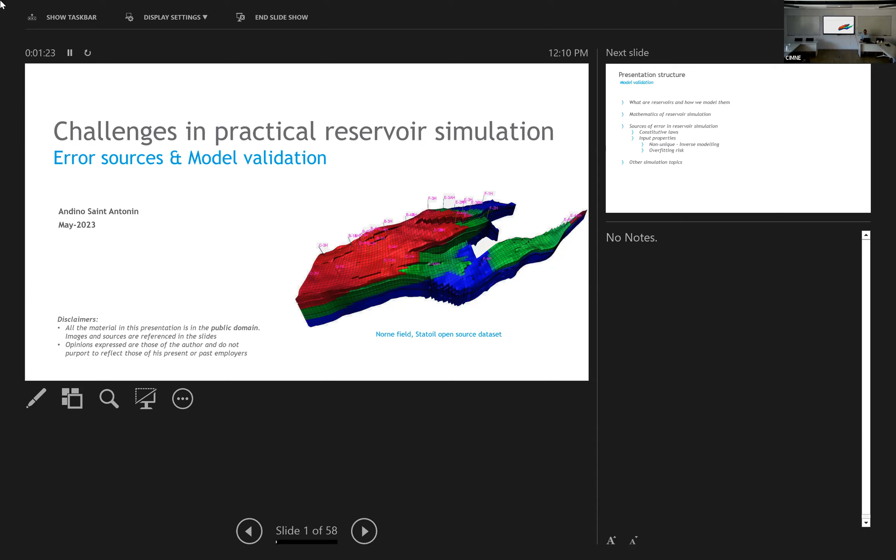Very quickly, a presentation structure. I'm going to introduce reservoirs, the physical processes we model, and how we model them. I'll go a bit into the math used to model reservoirs, then into the big topic, which is the sources of error. I'll also cover constitutive laws, and something specific to the oil industry: we're not very confident about the properties of the domains we're modeling, so we do a lot of inverse modeling. Then I'll mention a couple more simulation topics that might be of interest.

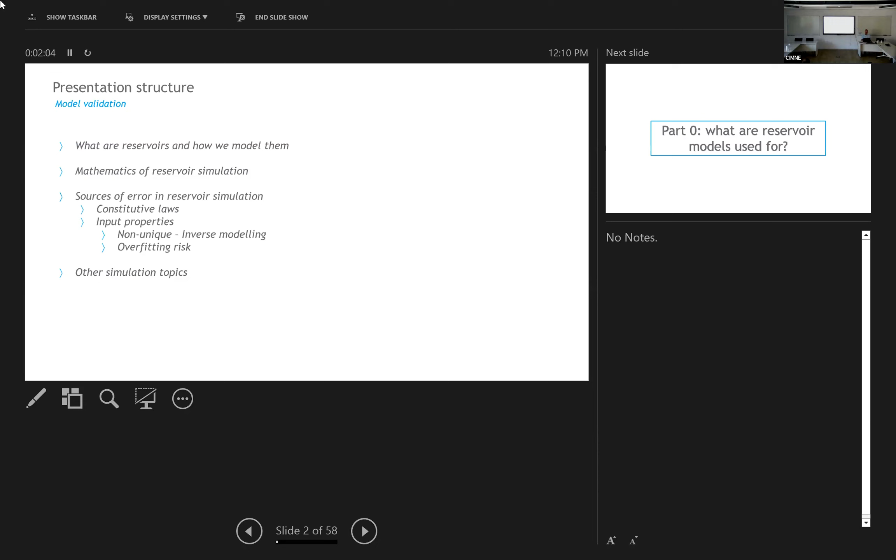So first, what is a reservoir? A reservoir is a porous rock that bears oil or gas, and oil or gas have less density than water. If you drill a well downward, you will always find water. All rocks are always porous and always water bearing; after 5 or 6 meters, wherever the water table is, you will find water. Water is much denser than any hydrocarbon. So whenever hydrocarbons are generated in the mother rock at high temperatures and pressures, they float up through this porous medium.

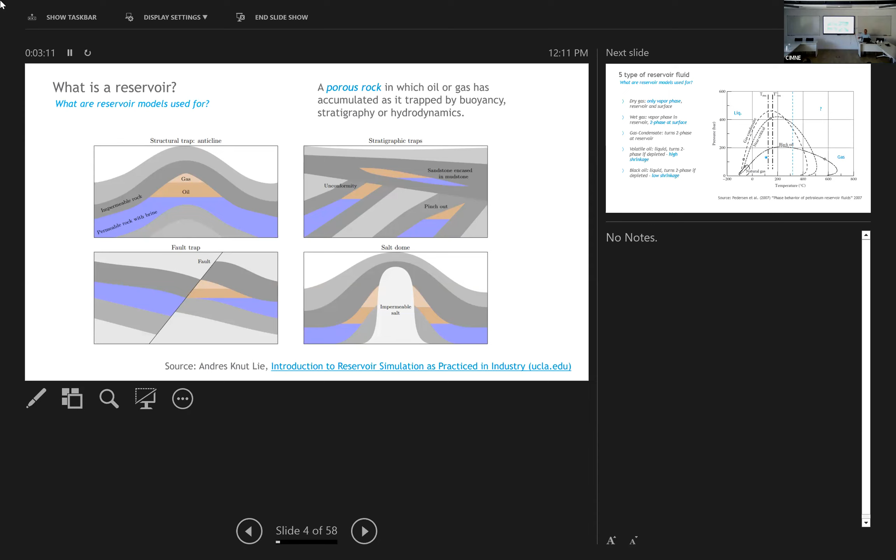Occasionally, a very small percentage of these hydrocarbons migrating up through geological time get trapped by some seal rock. There are variations, but it's normally a structural anticline or a fault that generates a seal where it normally shouldn't be, or a salt diapir that deforms and causes a structural trap.

There are 5 types of fluids. You might be familiar with gas and oil, but there's actually a lot in between. What we call gas is actually dry gas, which is basically only a vapor phase, both in the reservoir and at surface conditions. However, all the other gases, such as wet gas and gas condensate, turn two-phase.

Gas condensate has what's called retrograde behavior: you depressurize the reservoir and liquid drops out of it. It's strange, rather counterintuitive. Then you have classical black oil, defined by low shrinkage, so as you lower the pressure some gas comes out but not too much. High shrinkage oils, or high volatile oils, shrink by a lot when depleted.

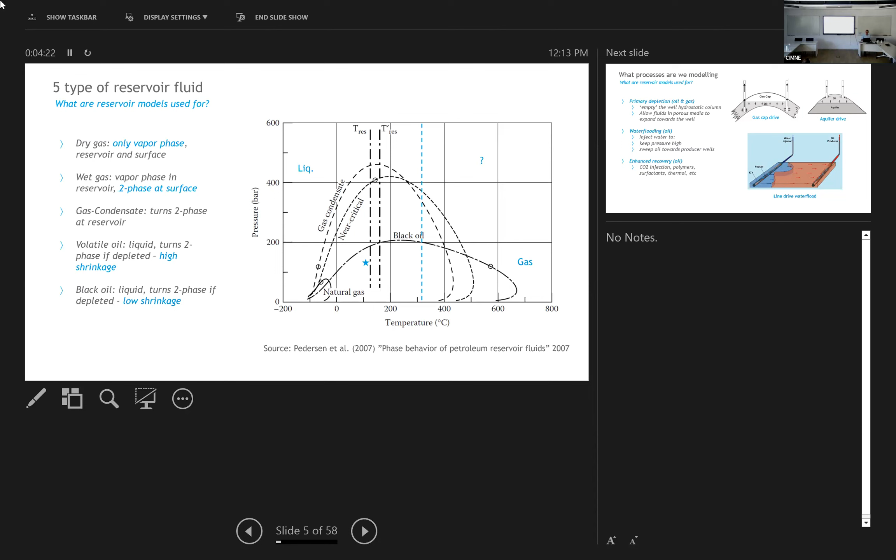So grosso modo, these are the fluids that we have. So what kind of processes do we model?

There are essentially three basic processes, three categories of basic processes, and there's a family within each one. The first one we call primary depletion.

The idea here is you drill a well to reach your reservoir. When you're drilling a well, this is a very important concept: at all times, the well must be dead. You cannot let fluids from the formation into the well, because that causes a blowout, and these are newsworthy events. So when you drill a well, you have this mud weight, this mud column, that's basically keeping the pressure inside the well higher than any layer cake formation that you're touching.

Once you lower your casing, you cement your well, you perforate exactly only what you want to allow to produce. You can remove the hydrostatic column from the well using pumps or other methods - that's a whole topic. You lower the pressure on this well, which behaves like a pressure sink, and your fluids, which are at high pressure, start moving towards your wellbore. If that's all you do in the reservoir, that's called depletion.

You might get some help. Normally the single phase expansion of oil will only recover about 3% of the volume, depending on conditions. But you might get lucky and have a gas cap on top, and the gas cap behaves like a gas - if you lower the pressure to half, the volume will expand by 2x. So if you drill your wells in the low portions, the gas cap might give you extra energy, and your pressure doesn't get lost so much.

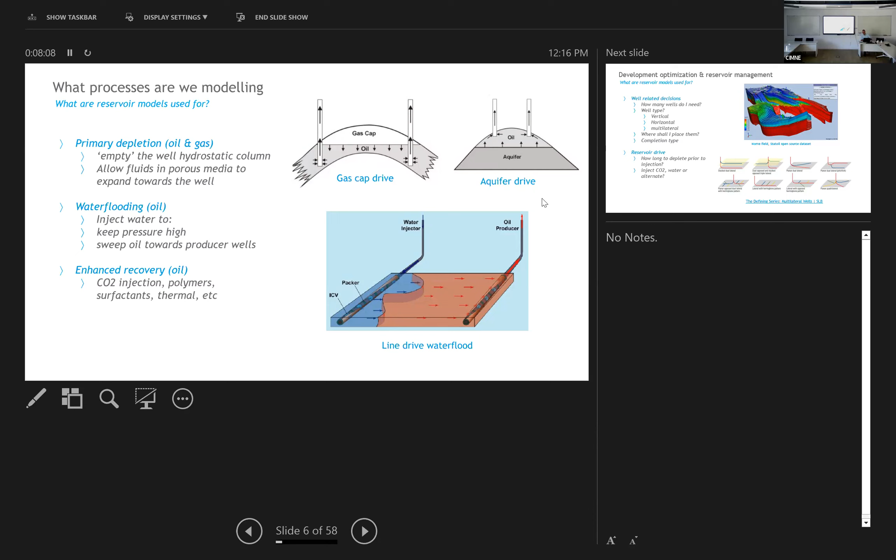So what do we use these models for? There are so many uses. The first one, which is my specialization, is development optimization. You have this oil field that has been discovered - perhaps 3 exploration wells, 10 appraisal wells - and you have to make a business development decision. How many wells are we going to put in this field? Will they be vertical, horizontal, multilaterals? Where should I place them? Shall I target a specific formation? Shall I stay away from the aquifer because I expect it will be strong, or stay away from the top because I expect the gas cap to develop? For all these questions, simulation models are the perfect tool.

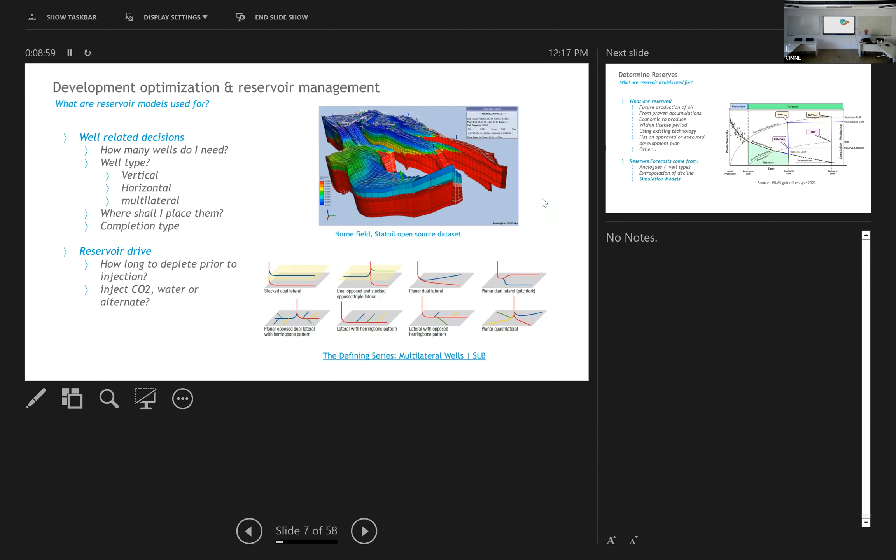So that's development optimization, or reservoir management. The second use is to determine reserves. You don't determine reserves with a model alone - there's much more to reserves than the simulation model, but simulation models provide you with reliable forecasts.

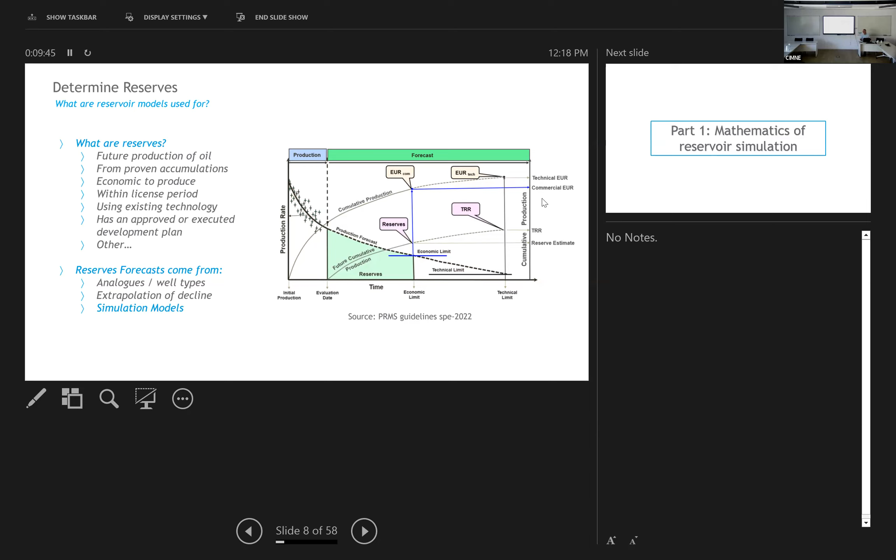Reserves involve a lot more, essentially because you have to look at license periods, whether the economics are changing over time. You have to have a price forecast. You have to look at existing technologies. There has to be an approved development project and a commitment to invest, etc. So reserves are much more than just simulator output, but the output normally comes from a simulator. This allows you to determine reserves, which are basically the value of a company - how much oil this company will be able to produce.

Okay, maybe something a bit more up your alley now. What's in a reservoir model?

A reservoir model has multiple components, simplifying a bit here. Essentially we have a geological model, which is what you'd call the grid. It contains all the subsurface information as an integration of everything we have, including the basic geometry, porosity, and permeability. I haven't defined those terms yet, but I will later.

Porosity is essentially the empty space inside the porous medium. Permeability is basically the penalty in pressure you pay when trying to push a fluid through that porous medium. It's not free, it doesn't flow automatically—you have to push it, and there's a penalty in terms of pressure or energy.

Then there's a flow model, where we solve flow equations. This is a simplified case called the black oil model, but it's essentially a material balance. To determine velocities, we use Darcy's law—I'll get into that. There's also a well model, which is below grid resolution. It's a sink and a boundary condition; the well model basically sets the boundary conditions, or you can treat wells as sinks or boundary conditions.

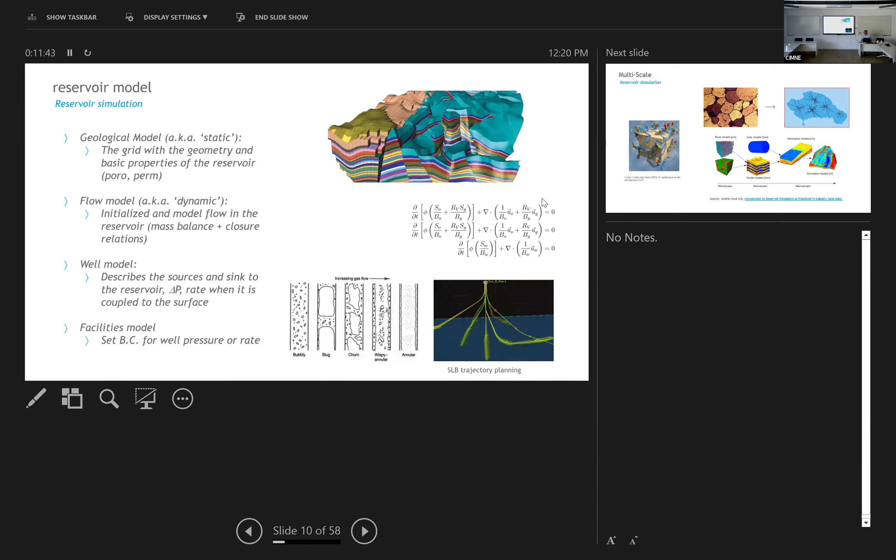An important factor to consider is this is a multi-scale phenomenon. On the left is a fine-scale simulation—no one in the industry does that. You cannot model a field explicitly; a field is maybe tens of kilometers wide and hundreds of meters in height.

So we live at a completely different scale. Your average simulator will have cell sizes on the order of maybe 50 centimeters to 1 meter vertically, and 50 to 100 meters horizontally. These cells are quite coarse because we need to model a huge volume.

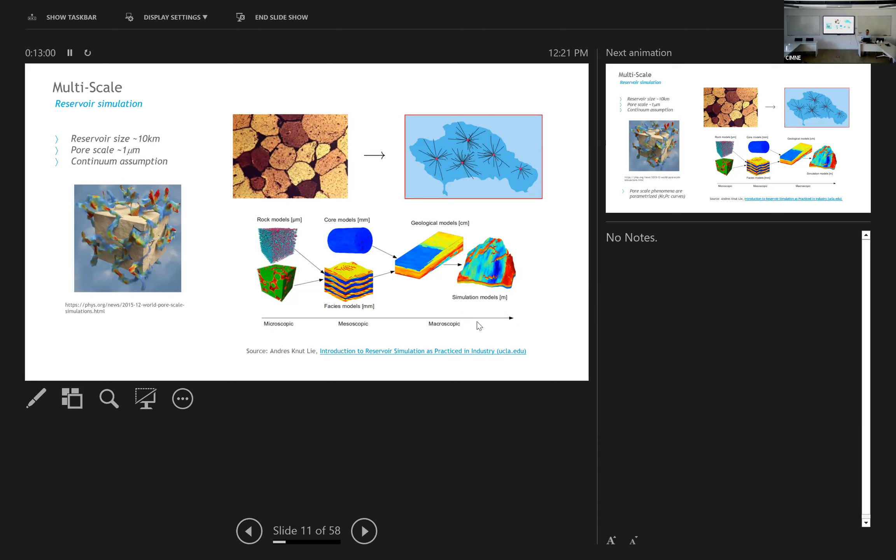So of course we make continuum assumptions—we cannot solve Navier-Stokes at the pore scale, and we don't actually know exactly what the porosity looks like anyway. So we make a continuum assumption and use functional approximations to describe this complex porous process, which will be the subject of discussion in the next slides.

Some critical concepts of flow in porous media: you have a certain porosity, and as I mentioned, all rocks have porosity—all sedimentary rocks particularly do. You can have 2 or 3 phases, and these phases are immiscible.

That means the oil, water, and gas, even within the same cell, will have different pressures. Why? Because oil tends to be non-wetting—it doesn't actually touch the pore wall, and there's a certain curvature in the droplets of oil. This curvature, this tension, compresses the oil, so the oil pressure is actually higher. So you have to segregate the pressures of the different phases.

We have mass conservation for every phase, and we have Darcy's law, which is actually derived by averaging and neglecting certain terms from the Navier-Stokes equations. Darcy's law essentially tells you—it's a bit like Fourier's law of heat transfer, or Fick's law—that velocity is proportional to the gradient of a potential.

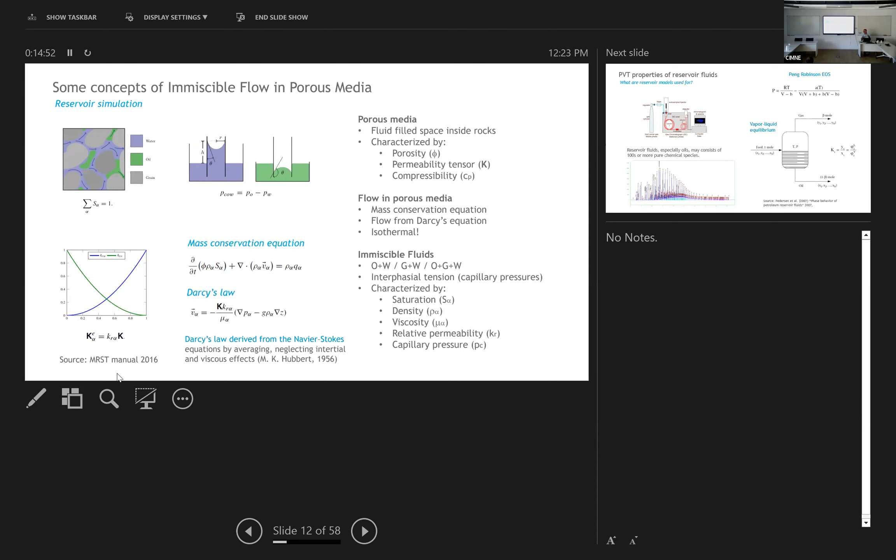Sorry, I forgot to mention: on the left there is what's called relative permeability, which models, as a function of the saturation of the different fluids, how much they tend to flow. If you have a lot of water and very little oil, the water will tend to flow preferentially—that would be on this side. And on the other side of the plot, if you have mostly oil, the phase that will flow will be predominantly oil.

So basically, the flow is proportional to the volume.

A little word on the reservoir fluids. Basically, what the simulators are calculating internally, they're using equations of state, and these equations of state require input from a detailed compositional characterization. So you run your representative sample through a chromatographer, and out the other end you burn it, and you get a signal on a capacitor, and you get these peaks, and these peaks tell you what's inside your oil. And every oil is different, like people. You could have hundreds of pure chemical species inside each oil.

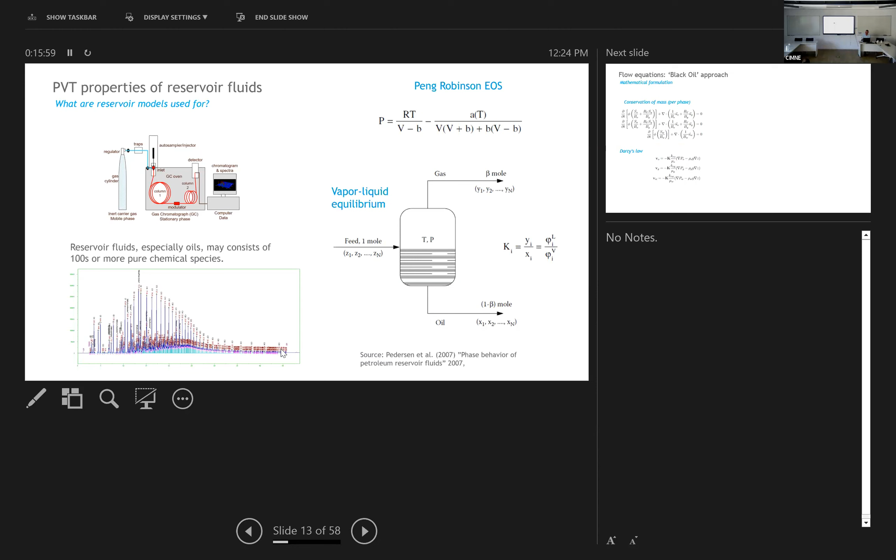This compositional input is upscaled in many ways, and it's used to determine the parameters of the equation of state, which you use to calculate vapor-liquid equilibriums and determine the properties of your phases, like viscosity, density, etc.

These are the black oil equations. They may look scary, but it's actually quite simple. This is just mass conservation written for the three phases, oil and gas, considering the fact that oil and gas are dissolving into each other, but water is immiscible. So the water equation, the third one in the conservation, is a simpler equation.

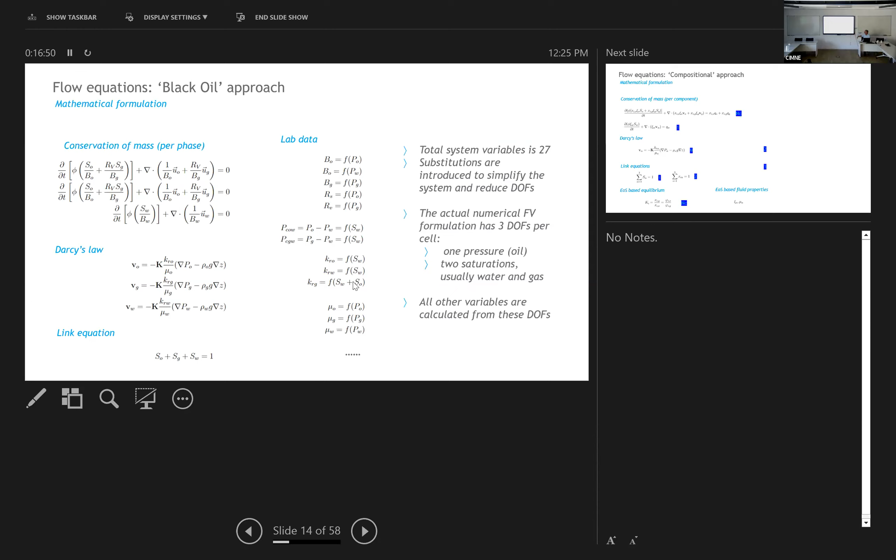And we have our Darcy equations and a linkage equation, which says that the sum of the saturations has to equal 1. And then we have a lot of lab data where all the coefficients of these PDEs are functions of the solution, but we read it from tables. We don't use the EOS for this simplified approach.

And then we have what's called the compositional approach. The compositional approach is more involved because now, instead of tracking oil, water, and gas, we're actually tracking the detailed components inside each of these phases. It's basically the same set of equations: you have a mass conservation per component, and a mass conservation for the water specifically.

You have 3 Darcy laws for each phase. You have linkage equations, same as before. You have the saturations add up to 1, but also the molar fractions have to add up to 1 in each phase. And then you have the phase equilibrium, which is calculated from the equation of state, which is what I showed you before.

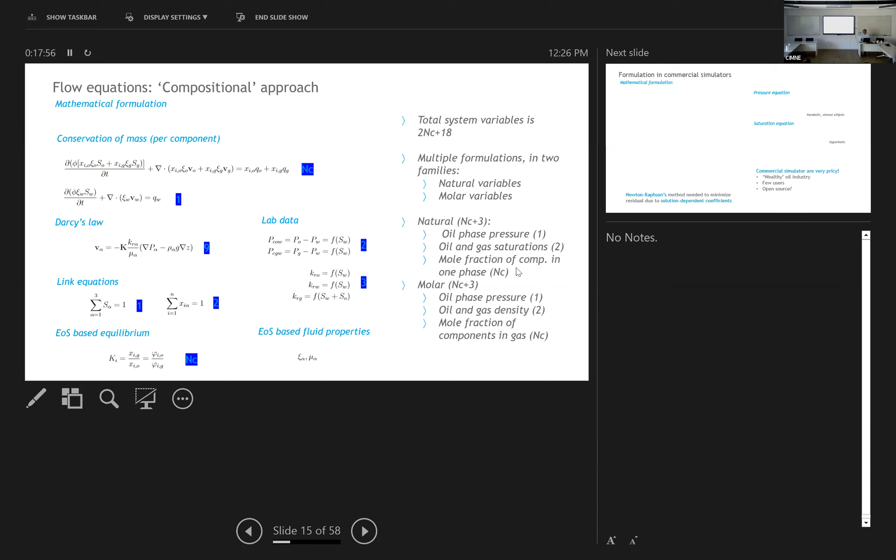Most formulations end up with, after you do all the substitutions—NC is the number of components—a total system of 2 times NC plus 18, but you can reduce that by substitution to a number of components plus 3. There's multiple ways to do that, and there's discussion about which one is more efficient, but I'm not going to go into that. Sorry, that animation is not working well.

Essentially, all the simulators we use, and the reason will become clear later, are finite volumes. Why? Because we don't need high accuracy, since we're not sure about the properties of our domain. Another advantage is it allows for flexible gridding. I will show you some geological models—we need to have some flexibility with our gridding.

For time integration, there are multiple approaches. There's fully implicit, which is the approach of some simulators, but most simulators are actually sequential. You split the variables to do the update. Remember, the coefficients of your system are dependent on the solution, so you solve the pressure implicitly, and then explicitly solve the saturations.

What you see on the right is a simplified problem. It's not the full complexity, but it's the two-phase incompressible flow equations, and basically it's two separate problems. This is the origin of the approach. You have the pressure equation, which is parabolic, but it's almost elliptic, so you're essentially solving the Laplace equation roughly for the pressure.

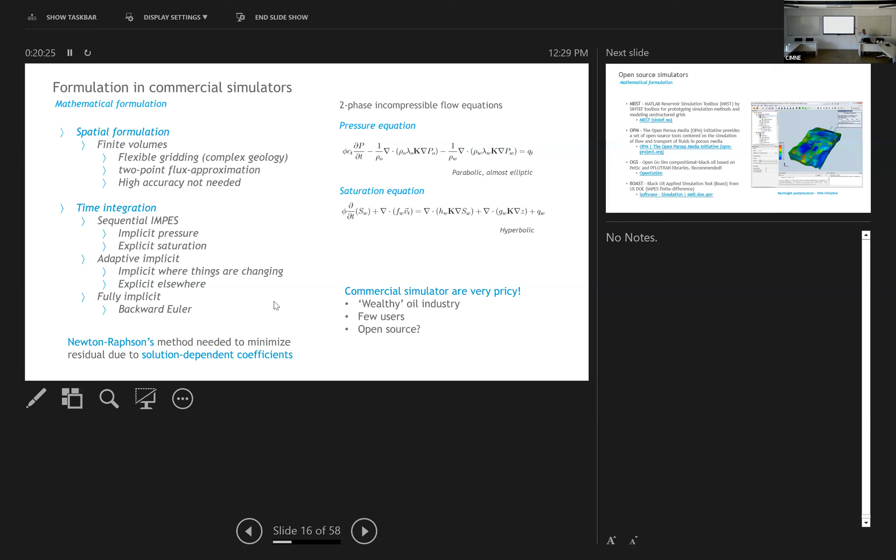So commercial simulators are very pricey because we have few users, and there's this perception that the oil industry is pretty wealthy. So are there any open source alternatives if you guys want to get your hands dirty?

Yes, the answer is yes, and this didn't exist for the most part when I started off. Only BOAST existed, which is finite difference and pretty aged, I would say.

But you have MRST, developed by Knut-Andreas Lie from SINTEF, and it's excellent. It's based on MATLAB, and his main focus was to look at unstructured grids, so it's got a lot of gridding functionality.

Open Porous Media, which is an open source initiative by many oil companies. The code is fully available in C++. You can download it, and they also have toy problems, but also open source reservoirs that you can use to tinker with. And then OpenGoSim, which is the new kid on the block, the only one that has full compositional simulation.

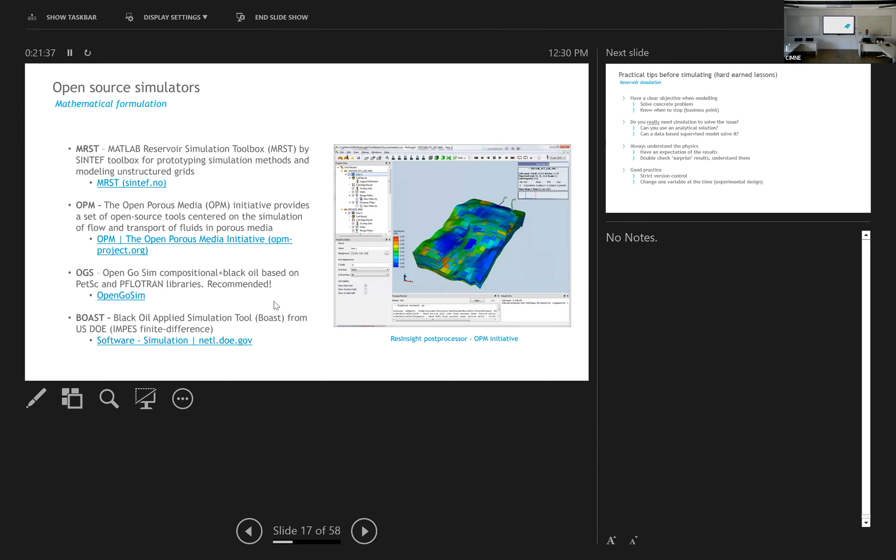It's actually marketed as a CO2 injection simulator, but it's a full-blown compositional simulator, so you can use it for modeling your oil fields.

Okay, before we get into the main sources of errors or the main challenges that we face, this is something I wanted to share with you. Maybe someone will be helped by this sometime, because these are hard-earned lessons from using simulators for a long time.

The first one is whenever you're going to sit down to use your simulator, you have to have a very clear objective: I'm going to solve this problem, and this is the business point. And the point is you have to know when to stop, because you can spend time and time and time, and it could become a random walk.

So does the simulation that I'm doing serve the purpose that I'm trying to fulfill? For that, you need to write down exactly what you are trying to solve.

Second one is, do you really need to use a simulator to solve it? That's a question you always have to ask yourself. Is there an analytical solution? And as happens quite often, is there a data-based supervised model that I can use to solve this problem? That sometimes is the case, at least in the oil industry.

Now, if you decide to do simulation, make sure you understand the physics. You should have an expectation of what you're going to get. And if that expectation is not met, make sure A, there are no errors, and B, make sure you recalibrate your perception, because it's what you understand that is guiding the whole process.

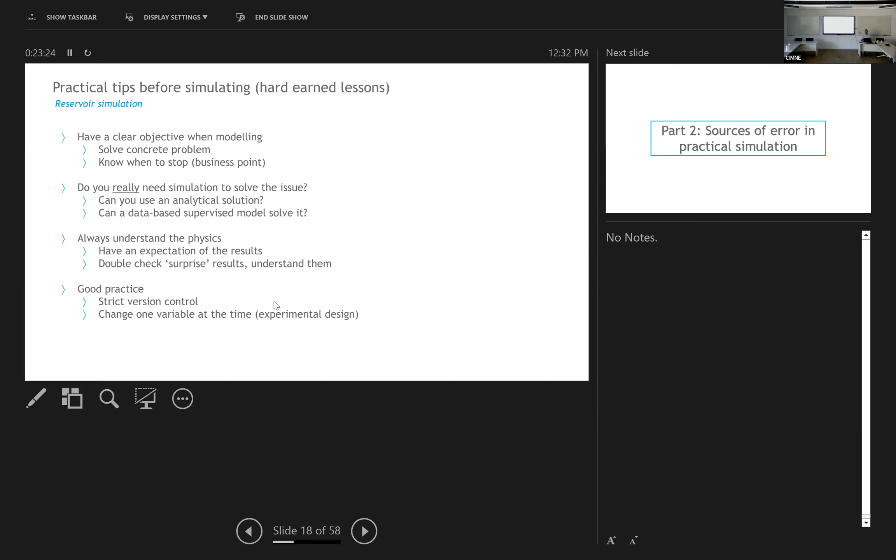And this is kind of silly, but strict version control is important. We deal with a lot of input, and you need to control exactly what you're putting in, because otherwise you get funny results. And just change one variable at a time when you're doing research, because if you change 2 or 3, you never know what is causing the results you're getting. Maybe basic stuff, but important to bear in mind.

So what are the sources of error in practical simulation? Classically you will see this chart in simulation books where you have a physical system, you idealize it with your constitutive models and conservation laws, and you get a mathematical model. You discretize that mathematical model, and you come up with a discrete solution.

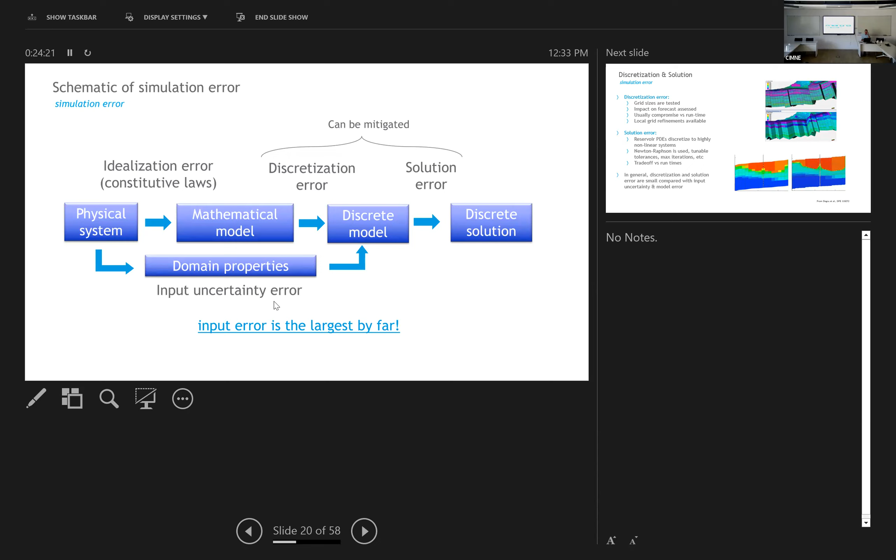And I've added domain properties there, because domain properties are, as we will see, a big source of error. So we model the physical system by assigning domain properties to it. Maybe in mechanics you don't think about that because you know the properties of fluid and steel. But in the case of reservoirs, you struggle a lot to determine your domain properties.

So just one slide on discretization and solution error. Normally this is handled quite well, and it's not a big issue. For discretization, what you do is you test different grid resolutions, and you basically try a notional development plan of what you plan to do on that particular field or reservoir, and assess the impact of the grid on your outcome, your business outcome.

And once you do that, you will very quickly see that you get convergence, so you basically stop at that resolution. We don't have high order methods, so it's always the grid that you test for convergence. It's always H convergence, never P convergence.

And the solution error, as I mentioned, the PDEs that we arrive at with reservoir simulation are highly nonlinear. So all the simulators have Newton-Raphson, and a lot of the focus in simulator development is how to update these coefficients efficiently. And you have tolerances and max number of iterations, etc., that you can set.

In general, commercial simulators are very robust, and you just use defaults. My take is that this is a topic you need to address, but as a general rule, it's not at all the dominant factor in the uncertainty of our forecasts, and you can quite easily deal with this.

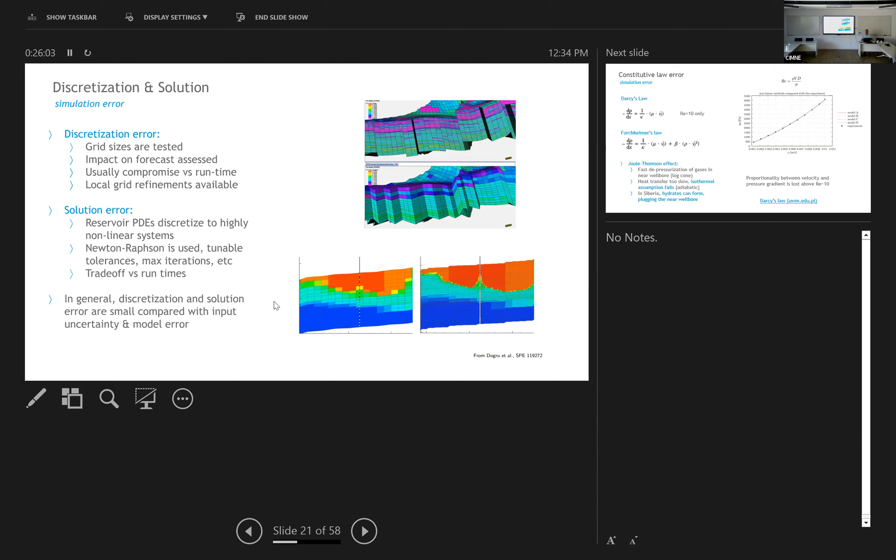So this is the discretization solution. I'm not going back to that. I'm going to talk a little bit about constitutive laws.

One of the constitutive laws I mentioned is Darcy's law. Darcy's law describes the rate per unit of cross-sectional area—it's not the velocity of any particular fluid, that's a bit of a misnomer. It's not a velocity; it's rate per unit of area because you have rock, and that rock changes your cross-sectional area. The actual velocity is faster—you have to divide by the porosity here to obtain the actual velocity of the fluid.

Darcy's law says the rate per unit of area is proportional to the pressure gradient, and it turns out this is valid only at low Reynolds numbers or low velocities. Experimental data shows that as you increase the Reynolds number—which occurs in most fields near the wellbore, because your cross-sectional area to that flow is getting smaller and smaller as you approach the well—you get a turbulence term, a quadratic term on the velocity.

So nobody uses this nonlinear law in practice, and I don't know of any discretizations for it. We use very coarse approximations for the cells that contain wells. I'll get into those later.

Another effect I didn't mention: we always assume that because these processes are slow, they're isothermal. But the formation is able to heat up the fluids as we depressurize gas, for instance. Because of the Joule-Thomson effect, the gas tends to cool, but we always assume it's isothermal because that process is slow—particularly near the wellbore, that's not the case. In certain regions in Siberia, you can get hydrates forming in the near-wellbore area because of this cooling of the formation, due to the rapid depressurization of the gas.

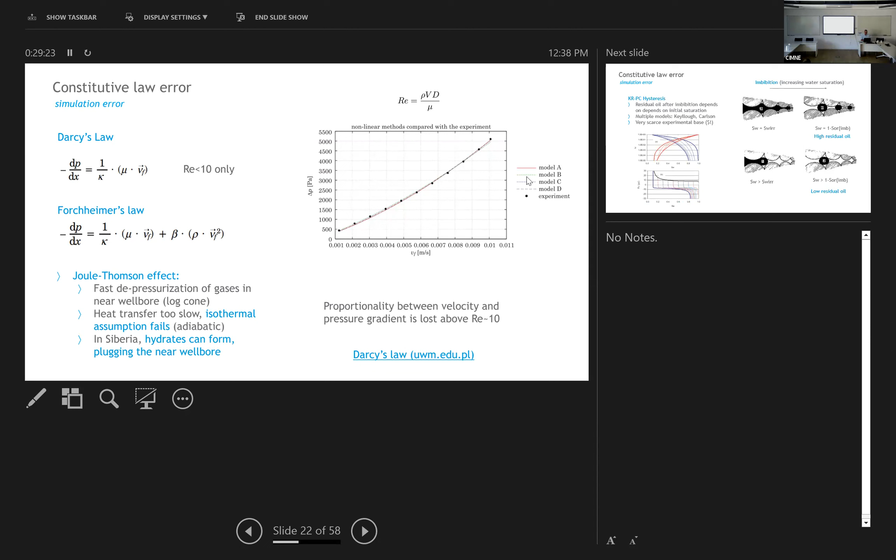So when you water flood this, you get droplets of oil remaining both in the large pores and in the small pores. Instead, if the oil was not at high pressure originally, then when you water flood and it recedes, you get this snap-off effect and there's a droplet remaining—but the oil that remains is smaller. So it's the same rock, same process for water flooding, but because the starting point is different, the outcome differs.

And if you have cycles—these cycles occur in certain occasions—then this leads you to use models that take into account this hysteresis process. We have hysteresis in two things: what I call the relative permeabilities, which describe how the phases affect the flow of each other, and the capillary pressure curves. Kind of a long topic.

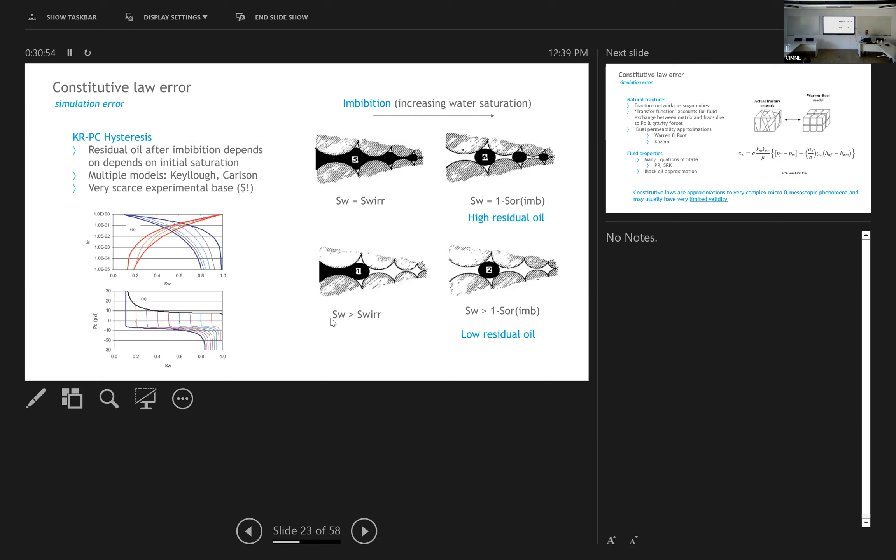And we have some analytical equations that regulate the transfer of fluids between the sugar cubes and the flow that is occurring in the fractures. And as we have with elasticity models, none of them is perfect, right? You can use one particular model for a certain circumstance and another model for another.

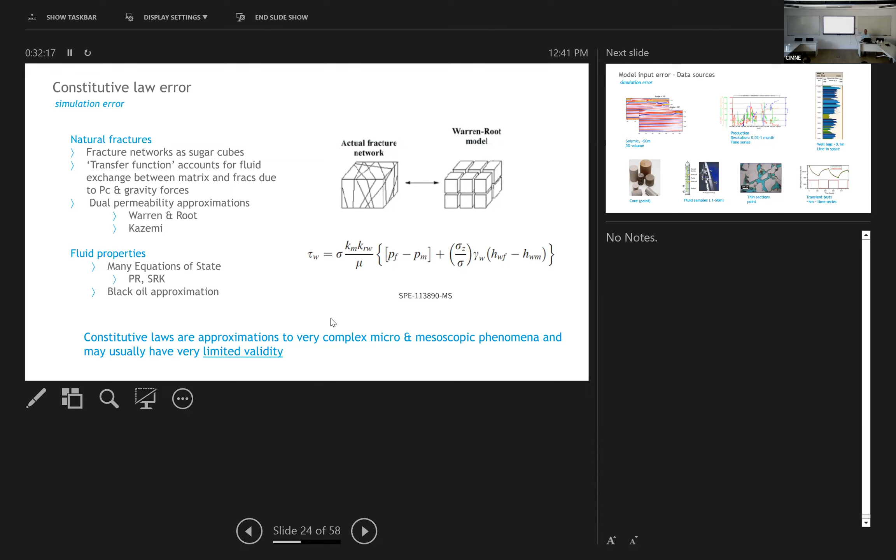So these models have steady state assumptions that may not entirely be valid. I don't want to go into fluid properties, that's a whole can of worms. But essentially we have constitutive laws that are related to the fact that we are modeling at a scale which is not the scale of the true process. The true process happens at pore scale. These constitutive laws are very complex, but they are very simple approximations of a very complex phenomenon occurring at pore scale, and as such they have to make a lot of simplifying assumptions and therefore have limited validity.

Okay, now I'm going to go into input data, just to give you an overview of the kind of data that we are having to integrate. We have data from different scales, right? We have logs, for instance. Logs are measurements of physical properties that you obtain when you drill a well. You run these logging tools, and you measure resistivity, speed of sound, neutron absorption, natural radiation from the shales.

And you get all these logs, and these logs get converted to the stuff that we're interested in, which is porosity, permeability, and saturation. You have seismic data, and seismic data is 3D. This comes from either generating vibrations or explosions on the surface, and setting up huge arrays of seismographs or microphones, if you will, and listening to the waves that come back. Then with all this information, you're able to construct a 3D model of everything underneath you. It's very coarse, very, very coarse, because only very low frequency can propagate in this universe.

Then we have core data. So when we drill wells, we obtain rock samples, fluid samples, and thin sections, which are obtained from core data, and they allow us to determine what type of pore structures we have. And finally, we have production data, right? Production data is a time series, and it's the response that our model should replicate.

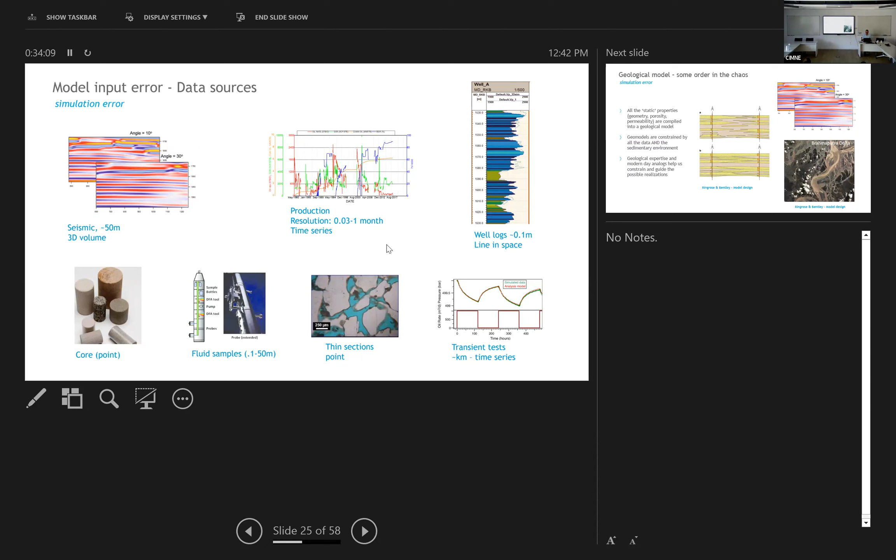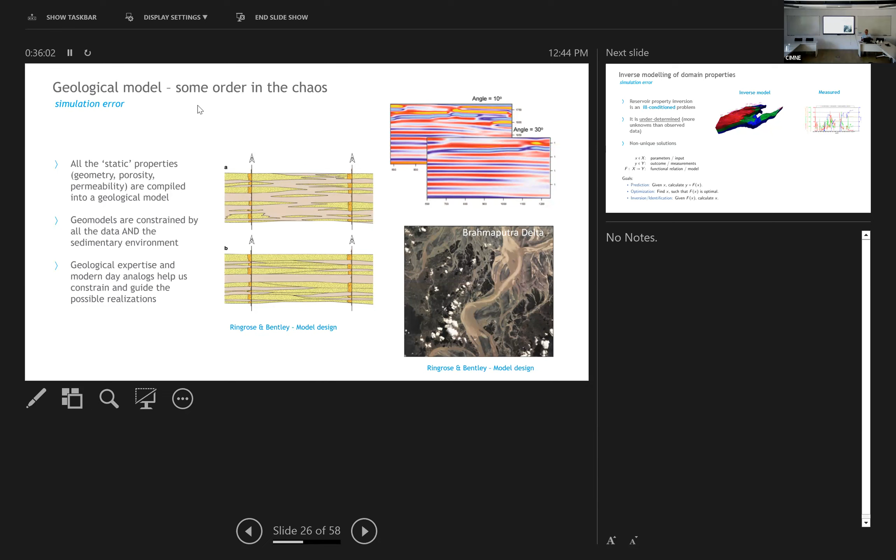A good geologist will generate realizations that are very reasonable, but you have to test these realizations to see if you are able to reproduce the observed behavior, the production curves that you see. Okay, so it's a bit of an inverse problem.

You might be familiar with computer tomography, right? You have a source, and this source emits whatever it is. I don't know the physics of it, but you have an array of sensors, and as this array goes around your head, you get this absorption versus angle, and from that image you're able to make an inverse model and obtain what is the cross section of that part of your body that is being scanned. So this is exactly the same.

You have your production curves, and you have to figure out what are the domain properties that generate that production curve. So it's an inverse problem, which is constrained because we have some data, but we have very, very limited data.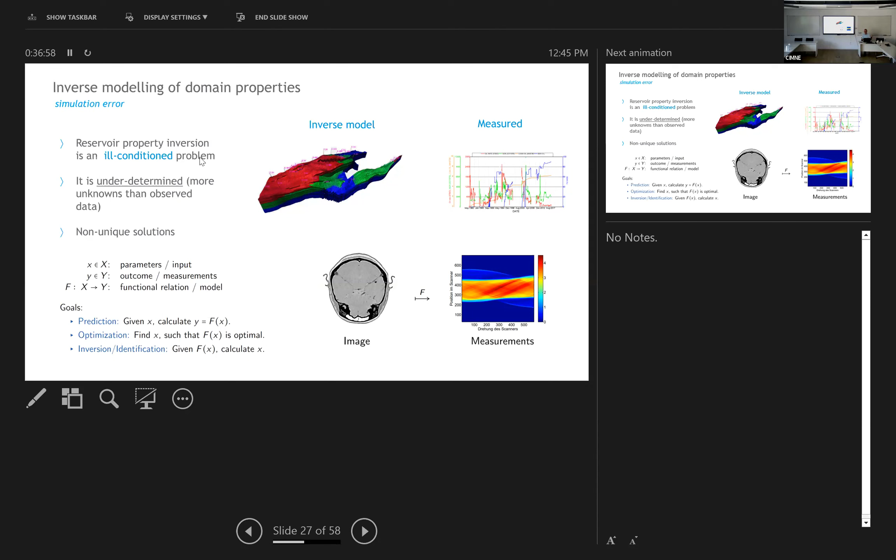Okay, so how do we solve this inverse problem? There are many approaches. This is the old school low-tech approach. We think of model tuning as an artistic process. So what you do is you get your geological model, and then you start noticing that there's some mismatch between the forecasted production in a few wells versus what is actual. So you increase the permeability here, you increase the porosity, you lower the structure, and you go into an exercise of local adjustments. And this is a lengthy process, and it's very intense because as humans, our attention is singular.

So we focus on one aspect at a time. So it's a sequential process, and you come up with something that doesn't look geological at the end.

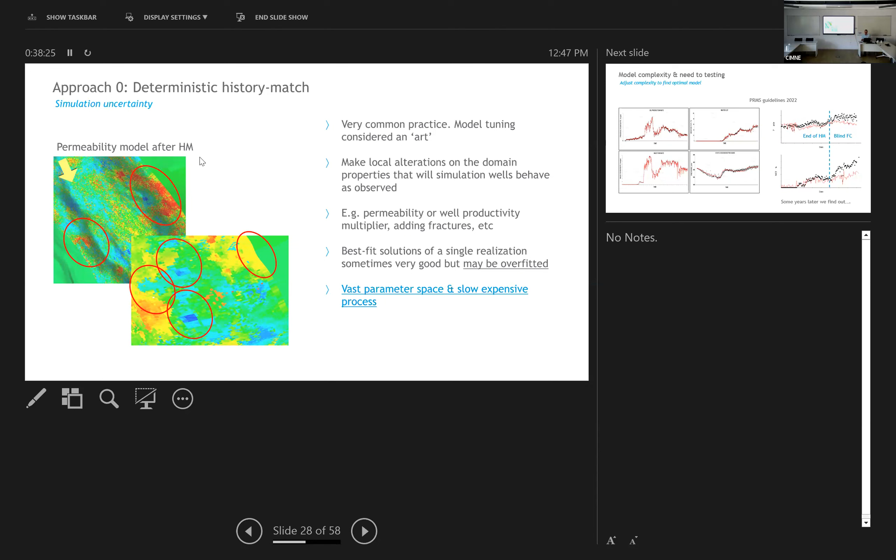So you can see here, this is a permeability field after history matching. That's what this calibration process is called, and you can see patches. We should expect more continuous variations, and that's not what we get. But this is the old school approach, and to some extent it works, but it's got its risk, and the risk is overfitting. So this is again open source data.

You see here on the left a very nicely history matched model, and this happens quite often. You come a few years later, you update the production history, and you compare to the forecast, and they deviate significantly. Okay, so clearly you see here on the bottom right, the water cut that the model is predicting has a completely different evolution from what actually happened, and this is because the way you reproduce that water cut is not the way the true mechanism that is going on in the reservoir.

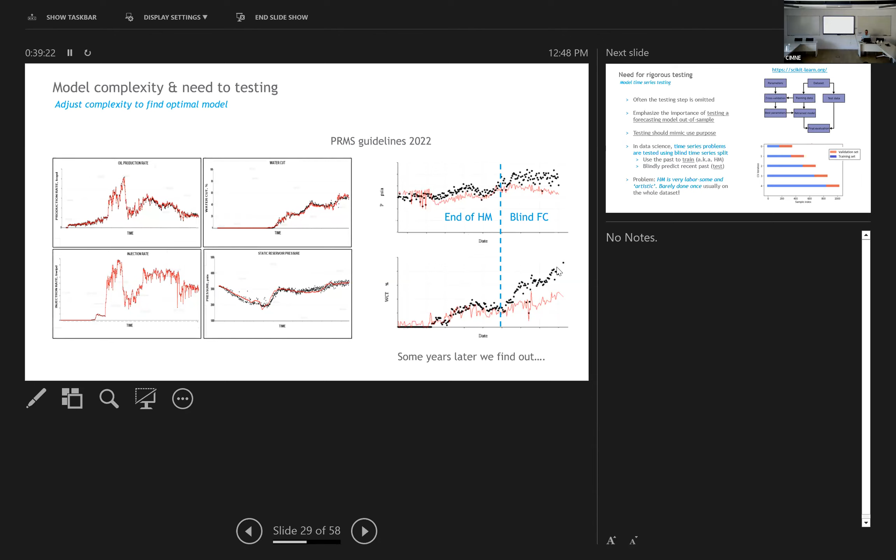So even if you have a perfect history match, you don't know whether you are overfitting or you are actually predicting correctly, capturing the signal as opposed to the noise.

So the way time series problems get tested in data science is you reserve the last portion of your data set and you predict it blindly. Here I'm showing cross-validation, but the testing is the same principle. So your training set should be in the past, and you should blindly forecast the future.

The part of the problem, and you have to understand, is maybe a simulation run will take one day, and it's very laborsome just to generate something that works. It's a lot of work with the tools that we have. So this is why sometimes it's only done once, just to comply with the fact that you have to reproduce a history. But the focus on prediction is sometimes lost.

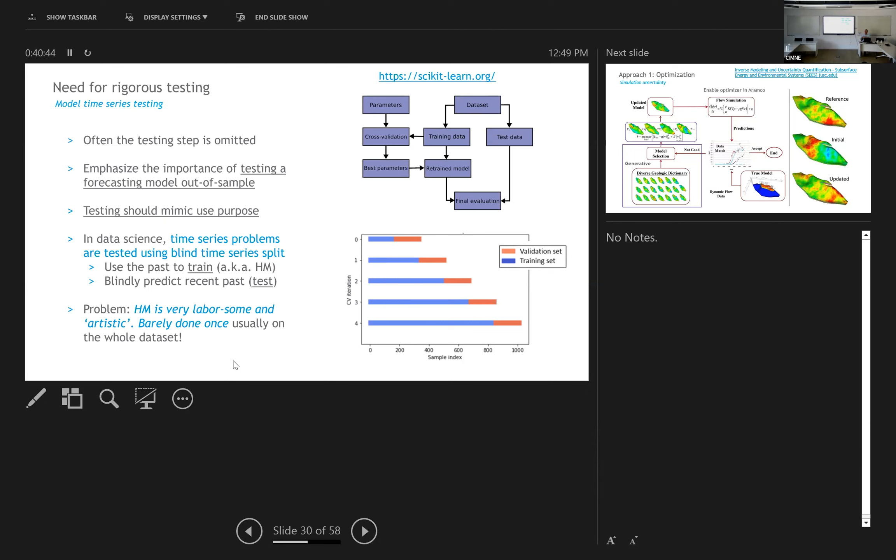There are alternative approaches, and this one I really like. I haven't applied this myself, but I know some colleagues that do. And this is treated as an optimization problem.

So here you need a very good geologist that will generate for you a lot of geological models. And what you do is you take this diverse geologic dictionary, which is a lot of possible realizations that are compatible with the observations that we have in the well and the seismic, but they're very different. They're qualitatively very different. The more different, the better. It's not orthogonal basis like we would like, but you want them to be as different as possible.

You treat this as an optimization problem. You basically take a linear combination of these models and make a new model out of them. Then you run your flow simulation and make a prediction. Then you have a mismatch function, like a loss function, and you try again, assigning different coefficients. You use some sort of gradient method to minimize the discrepancy between your prediction and the observed data. This is one of the approaches.

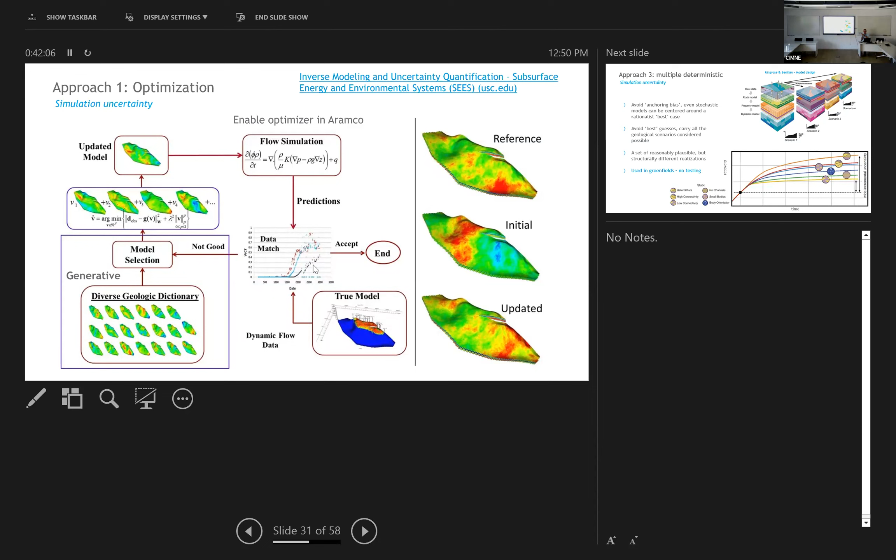Another approach, which I'm very keen on, especially for fields where we have limited data, is to use multiple deterministic models. You sit down with your geologist and he says, okay, we could have long channels that connect, long channels that don't connect, we could have point bars, many different realizations of how the geologist thinks about this model. Basically you do a classical history match on each one of these models, but they're all qualitatively different, and this will give you intrinsically different forecasts. Here you have a curve of recovery versus time, and each one of these scenarios will give you a different assessment of what the field performance should be.

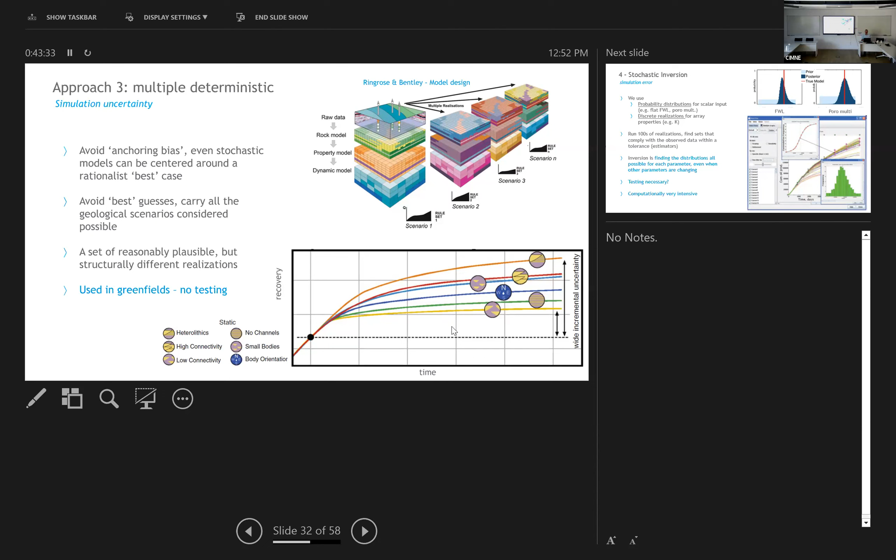It's normally applied in green fields, where we have very limited data. Maybe we have a few production tests, but no production history. I think it's a great approach because it conveys the true uncertainty to your management and it avoids anchoring bias. We shouldn't think about these reservoirs as being known. We will only know once we produce the last drop of oil, though some uncertainty will remain. So especially when we have limited information, we should have very different model designs.

And this is an approach which I'm very keen on, and it's to do a stochastic inversion. What you do is for any scalar input, for instance the level of your water, or you could use a porosity multiplier, you use a distribution, and normally in your prior model here on the top right you'd use a uniform distribution. For other array properties, you use discrete realizations, and the more different, the better. What you do is run hundreds of combinations of these parameters using Monte Carlo, with certain sampling details that aren't relevant right now, and you obtain a lot of production forecasts.

You're able to say, of these hundreds of production forecasts, there are a few that are within a tolerance of what I observe in the field. That allows you to come up with posterior models that are constrained, like a Bayesian update. You have an initial distribution, which is just a uniform distribution, and through this loop you generate a lot of stochastic runs, and you're able to come up with a posterior distribution that is updated, giving you a constrained set of runs. You're able to forecast into the future with the proper uncertainty, because you're forecasting with an ensemble, not a single realization.

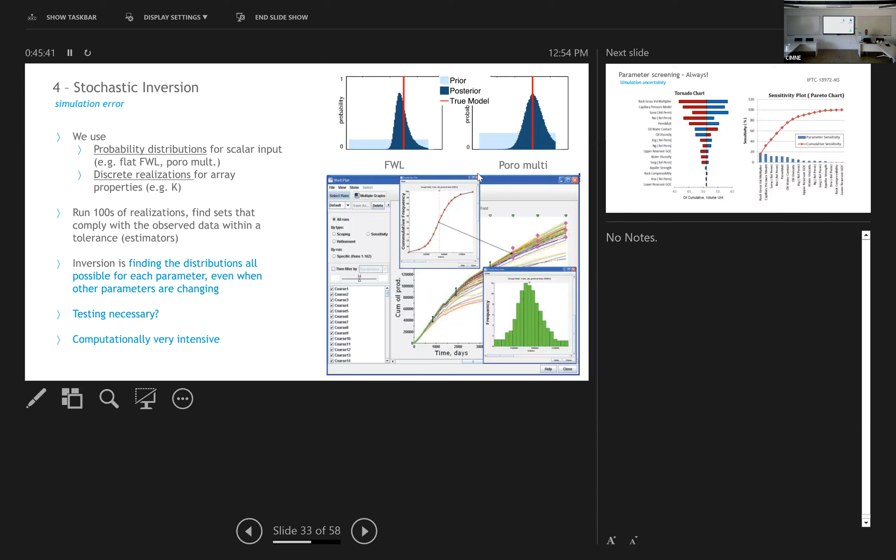I wonder, and this is an open question, whether you need to do testing here, or whether the fact that you're constantly forward predicting and matching the historical production is enough. Computationally, this is very intensive, so if you want to apply this on a big field, good luck to you. You need models that run in minutes, not hours. This is also like the common sense remarks I made at the beginning of the talk.

Always do parameter screening if you're looking at uncertainty, because there might be things that are not affecting your target. If you want to look at the recovery of a particular field, maybe there are certain parameters that are not relevant to look at because you tried them in the whole range. Let's say you don't know what your oil viscosity is exactly, it might be 0.8 centipoise or 1.2 centipoise. If you run with 0.8 and with 1.2 and get exactly the same results, you don't know the exact value, but it's not relevant.

But there are other parameters that are different. In this case, for instance, the rock gross volume multiplier: if the size of your field is larger or smaller, it gives you a completely different forecast. So you need to really focus on that.

What about shape? I don't want to get into a lot of detail, but normally the geological model process is manual 99% of the time. You generate a grid and can do grid resolution sensitivities, but to change the grid is very laborsome.

So what you do is account for the fact that it might be slightly thicker or thinner outside of well control. In well-controlled areas you know, but outside of well control you don't. So you define an array property measuring distance from a place where you know the pore volume, and multiply the pore volume of cells far from wells by 0.95 or 1.05 stochastically. That's easier to do.

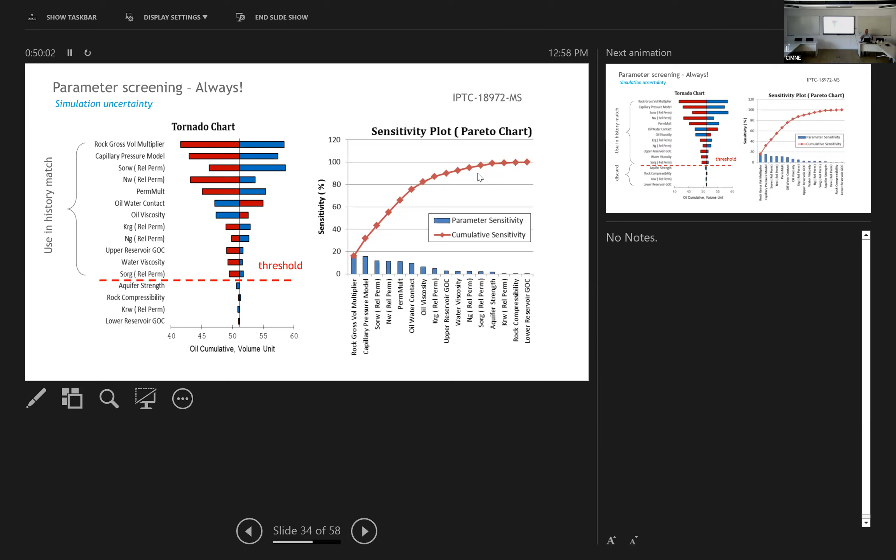And that's to wrap up that part of the talk. Highly detailed models cannot overcome the underlying absence of information. This is why we use finite volumes and relatively coarse cells—because we don't really know the domain properties. They can also have the negative effect of creating a false sense of understanding.

This is why stochastic methods are, in my view, much more superior—you're able to forecast an ensemble, and this ensemble shows you the uncertainty. So you are approximately right—you know the truth should be close to one of your runs. That's better than deterministically saying we're going to recover X barrels, and being exactly wrong if you do that.

Because the cross-sectional area goes with R, as you're approaching your well, your velocity becomes really large. I didn't do the math for Ricardo, unfortunately, but your velocity becomes really large, and basically everything that happens there is below grid resolution.

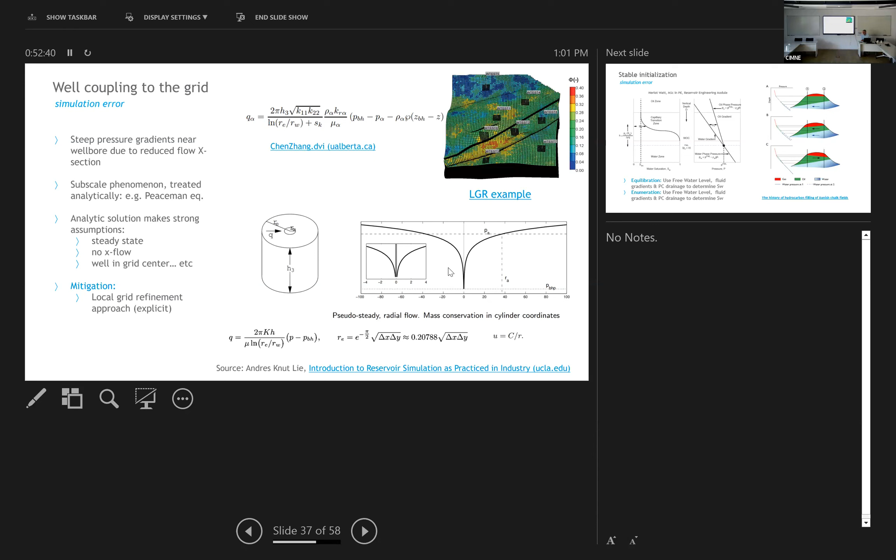You can mitigate this with local grid refinements, but you have to decide whether this is an issue in your particular model or not. In general, well treatment and the well model itself is a whole one-hour presentation on its own.

Another challenge we face quite often is the issue of initialization. We think of these reservoirs as being static — if you look at the interface between air and water in a water tank, it's going to be flat, right? But here many factors might change that. For instance, you could have an oil reservoir where the oil has migrated during some geological epoch, some water chemistry changes create a seal, then there's a deformation, and suddenly you have a tilted contact. Or, as shown here, you have hydrodynamics causing your oil-water contact to tilt.

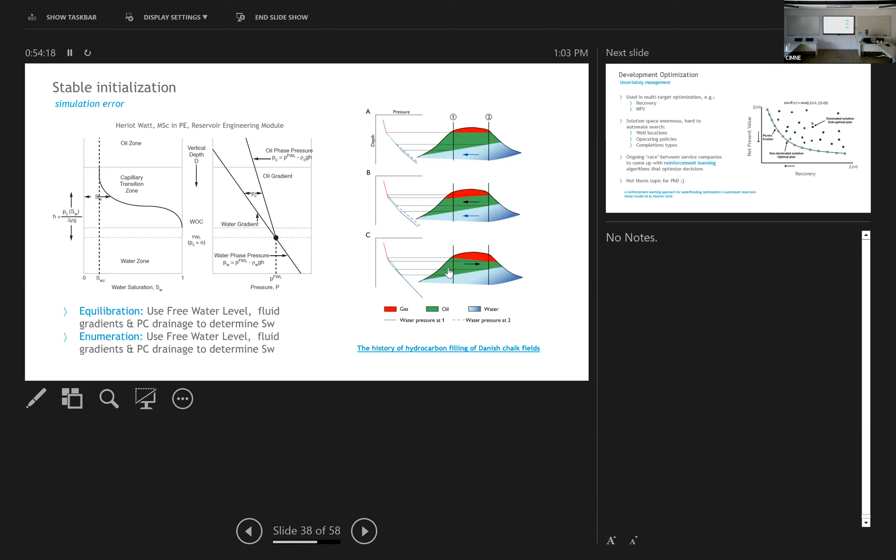In those cases, you have to decide whether to try to calculate and equilibrate these conditions. If you equilibrate, you get flows from the beginning; or if you force it, you have to fudge your constitutive equations so that it remains static. It's a bit lengthy to explain, but it's a real challenge: how do you set initial conditions that represent the physics of what's going on in the reservoir when you have tilted contacts? It's a big problem because the model is steady in the reservoir, but the physics dictates that it shouldn't be steady. So how do you do that?

And finally, this last slide is not a challenge of simulation specifically, but a challenge in general: once you have your model and trust it, you have to do optimization. You need to decide how many wells, where to place them, how to time them. Will you drill a lot of wells at the beginning, or phase them, drilling slowly and building up as needed? Will they be vertical or horizontal wells? All these decisions are what we build the models for — to test them and come up with an optimal strategy.

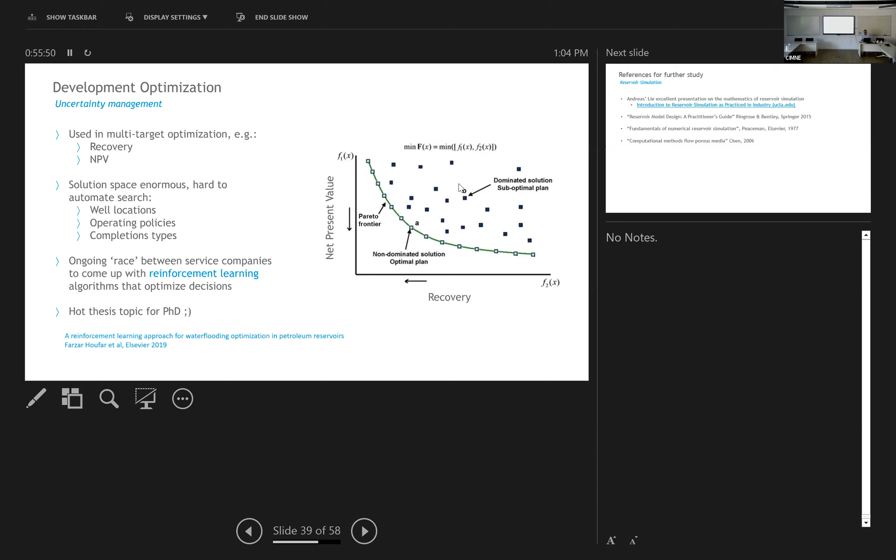So the question is how to come up with good development strategies, and especially whether you can do that automatically using reinforcement learning. That's a hot topic for a PhD thesis, by the way — one of the challenges we face in the industry.

That was my last slide, but I'll give you some references in case you wish to dive into these topics — these are chosen to be good initiation books. I particularly recommend this talk by Andreas Lie from the University of Norway, and Mark Bentley's Reservoir Model Design is excellent — a very simple read, actually. And Computational Methods for Flow in Porous Media by Chen is an excellent overview of the different numerical methodologies.

With that, my talk concludes. If you have any further questions or things you want to discuss.

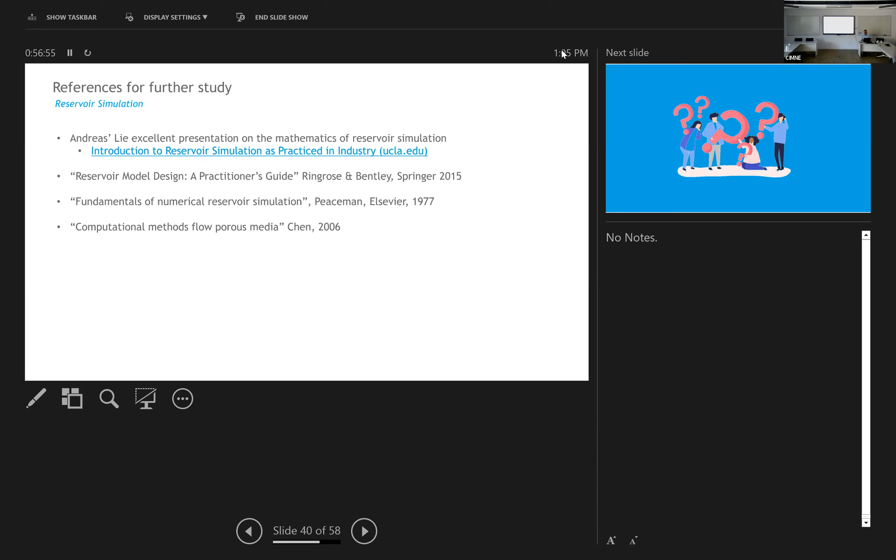Support guides are gone, so... share. Okay, guys, for those of you who are online, do you have any questions? Is there anybody online? I'm not sure the speaker is enabled. Check the chat also, for those who read. No question. Okay, I have a question. Sure, so I'll just stop recording.